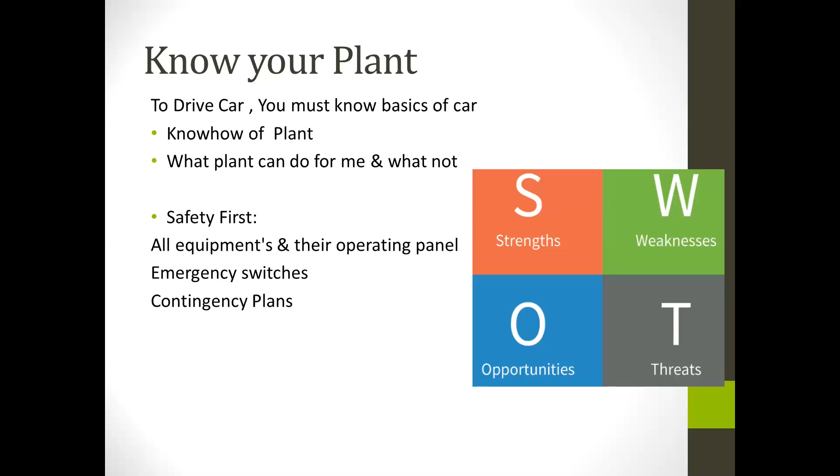Next is equipment capability. Floor manager must know the equipment capability of a plant, or we can say what the plant can do for us and what it can't do for us.

Say a molding machine, for example, ARPA 450. We all know the ARPA 450 machine can have a maximum capacity of 450 kgs. Among these 450 kgs, we have to accommodate weight of a match plate, weight of a pattern cavity, weight of a mold box, and weight of sand. Together, these should not exceed 450 kgs.

If we exceed these 450 kgs with match plate, pattern cavity, mold box, and sand, we could not get a good mold. So we could not blame the production person for mold dilation due to poor hardness.

Next is a furnace. We must know the furnace dimension, coil level, sand cooler capacity, in temperature and weight terminology - how much temperature drop it provides and how much sand it provides per hour.

Bentonite is actually activated in a sand hopper. So storage hopper capacity has a key role in production planning, and likewise it correlates.

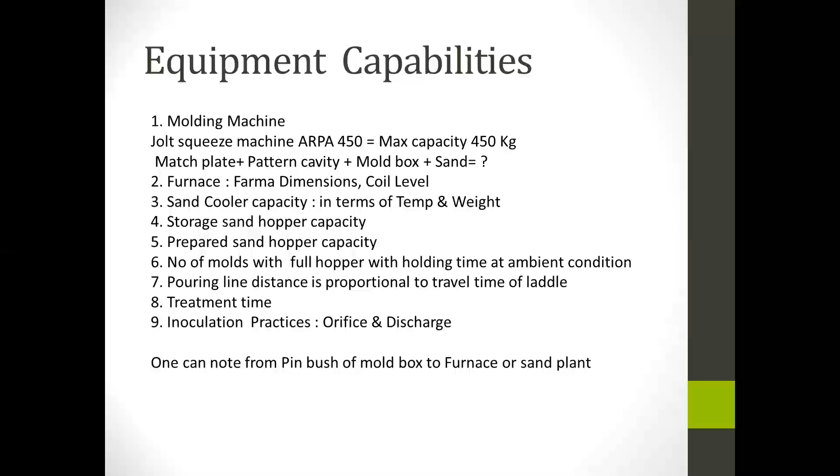According to which, pouring line distance is proportional to the travel time of a ladle. We must know the treatment time, inoculation practices. For the inoculation addition, what is the orifice size, what is the discharge of the inoculation. So one can note from pin bush of a mold box to the furnace or the sand plant.

Togetherly, on a technical basis, this saturation of information is called a design manual. In technical terms, the same thing is interpreted at QMS as organization knowledge, which is written at IATF 16949, page 24, clause 7.1.6. You know what a plant can do.

That is the basic thing - what a design manual can give us. It can give a guideline for development or acceptance of a new part. It helps to integrate the existing process. It helps to achieve better control on a process, as well as to set process inspection parameters and its inspection frequency.

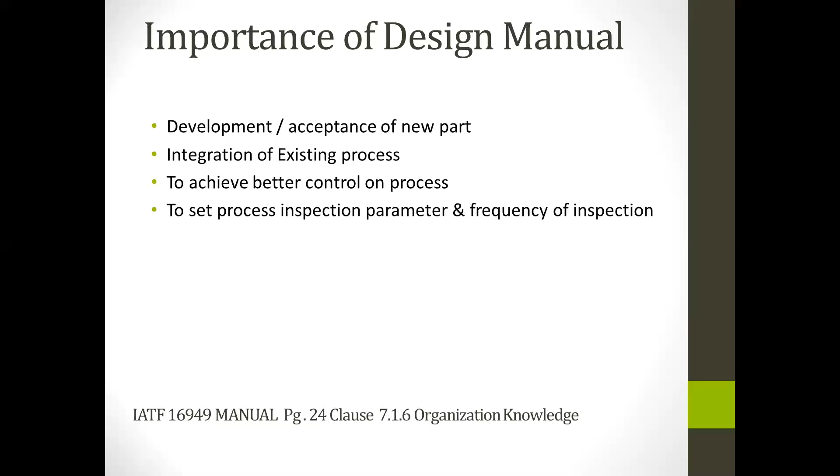But do remember that each company has their own SWOT analysis, so their own customized design manual. One cannot relate each other's design manual.

Then the role of a support function. To work on a shop floor, we need man, material, machine, and method. Method is defined by technical people like us. But to achieve good control, we must control the man, material, and machine.

Man is taken care of by the HR department. Whether you believe it or not, the truth is their target is always cost cutting. Next is material, which is aided by the store and purchase department - there is always an eye of management. And the third one is machine, which is aided by the maintenance department.

According to whatever my experience or whatever I have seen, it is the most ignored area in every foundry, but it has maximum cost saving potential.

For example, again we take the example of an ARPA 450 machine. A standard manual or machine manufacturer says the standard operating pressure is 6 bar. If the machine at our plant is consuming 7.5 bar pressure due to leakage issues, so what are we costing for?

We are costing for wear out of parts due to excess pressure, first of all. Then next is the excess cost of air that we are paying for. Then lack of air for other operations. So 1.5 bar pressure looks very small, but it is costing us very much in the long run.

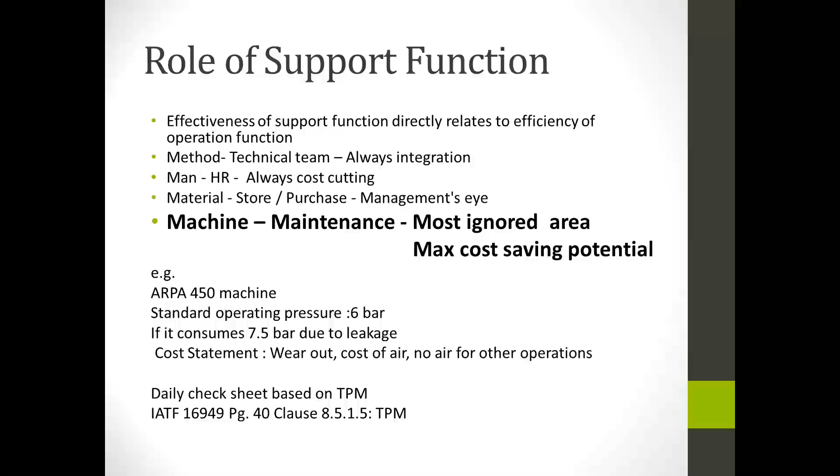Next one is rejection, the most sensible word in a foundry. On an everyday basis, we have to carry this word and live with this word because it is part and parcel of our life. To handle this, the most important thing is data acquisition and data interpretation.

How we collect the data and how we interpret the data. So right finding and right root cause of a defect is 99% of the achievement of a solution.

Monitoring of rejection is another thing, but monitoring of rejection on a production quantity versus inspection quantity is nowadays a question mark, because most of the foundries I have seen are monitoring rejection on production quantity, but the part which has not been inspected is only at the inventory. How can we say that it is a right part or a wrong part?

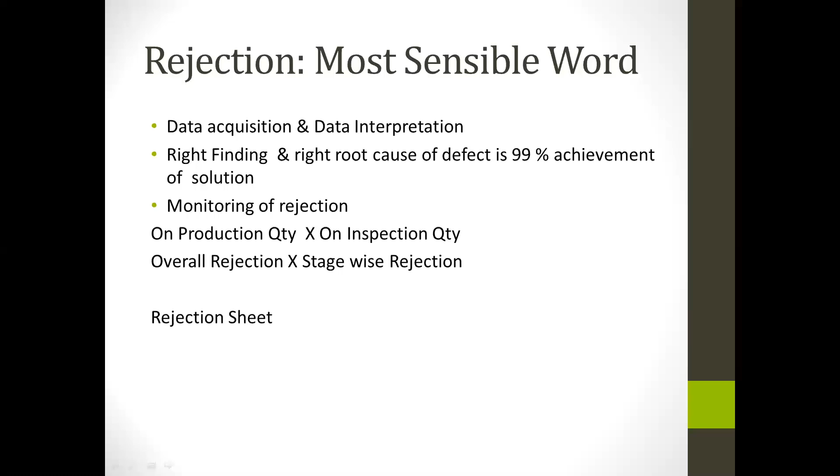Another aspect is overall rejection and stage-wise rejection. We have produced parts at different stages. So we could not correlate the part at the fettling stage with the part at the machining stage with the part at the customer stage.

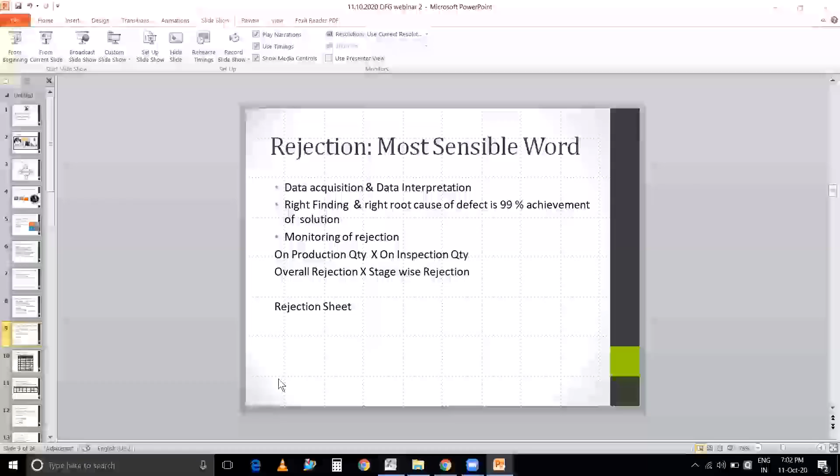So I would like to show an Excel sheet.

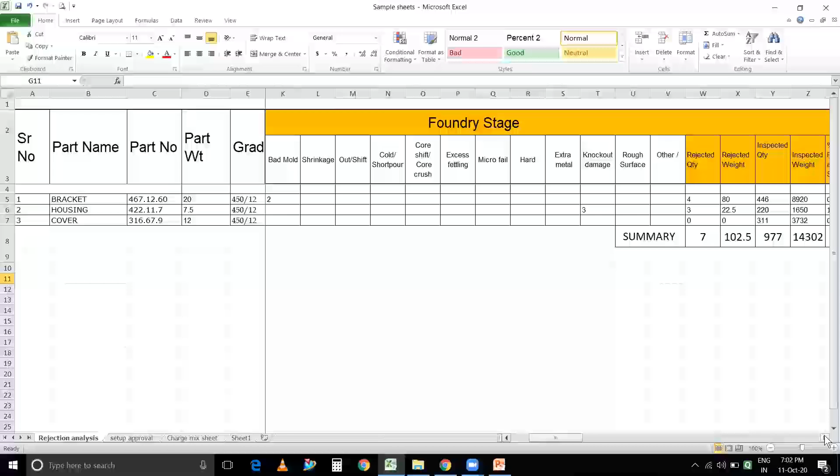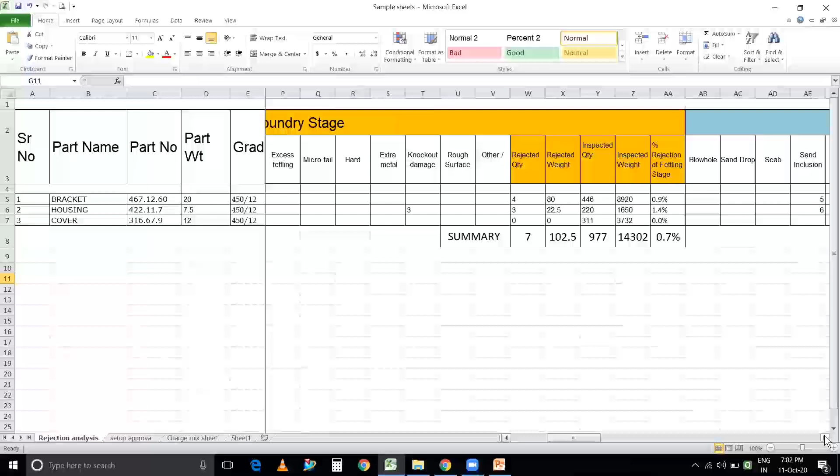Yes, here is a part name, number, part details. We have to take care of the foundry stage - the rejected quantity at the foundry stage and inspected quantity at the foundry stage. So rejection at the foundry stage is different, then rejection at the machining stage is different. Likewise, rejection at the customer stage is different. So we could not correlate these three stages with each other.

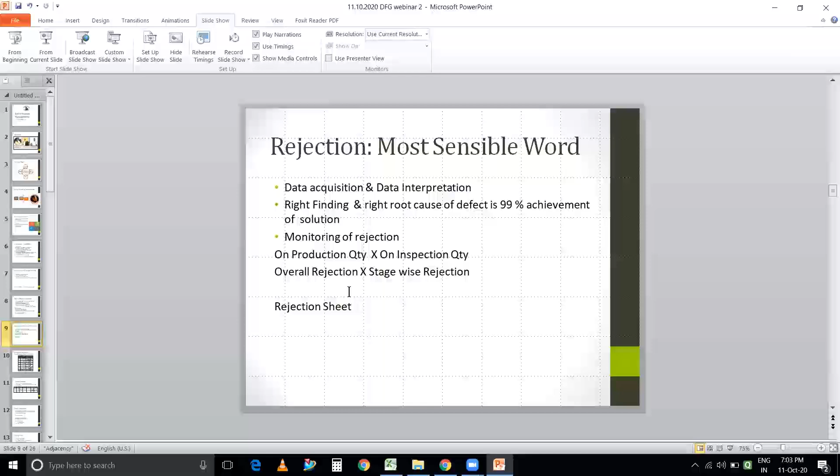Strategic approach for evaluation of a defective part. How we do the evaluation of a defective part is a crucial thing in a foundry. For example, I have generated my own sheet.

First, we identify the defect, say it is a blowhole. Then, at what stage the defect came out? It is at a machining stage. Then it comes with a severity, how much it contributes. Defected are 10 numbers, inspected quantity 100 numbers, so severity is 10%.

Then we go for traceability. When it happens on the same day, different heat code, shift number 1. Then next is the location of the defect. Cope box on a flange, all parts have the same location.

Then according to our experience, we found out probable causes for a blowhole defect. It can be due to sand moisture increase, metallurgical aspect, and venting.

Based on probable causes, we have to check reports - that is verification of a report. For sand moisture, we check molding sand reports. For metallurgy, we check lab reports, and for venting, it is our past experience, TGR and TGW.

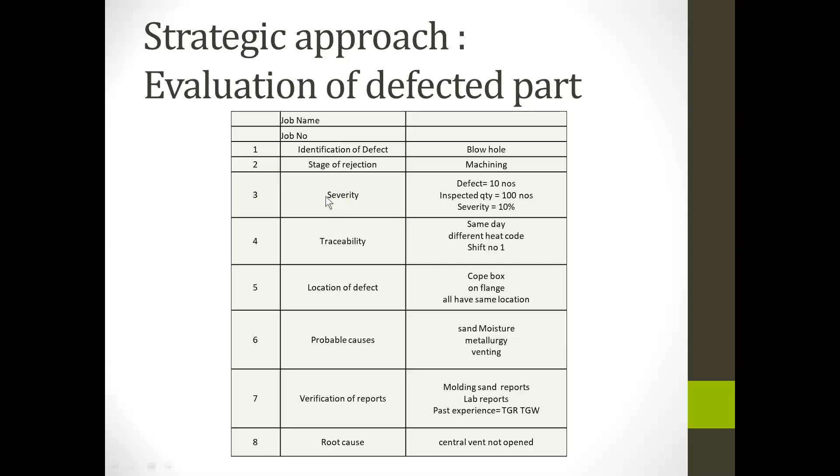Like a design manual, we can also make a defect manual. Based on this data, we can generate a part-wise defect manual.

Usually defect relates with the geometry of a part. Every part has a different geometry, but we can also check out that a periodic defect is happening with the same kind of part. So it depends on plant capability, foundry practices, and geometry.

Likewise, a date, defect, defect severity, defect location, its root cause, and action taken. So in the near future, if we get the same type of defect, we can also recall what action we had taken.

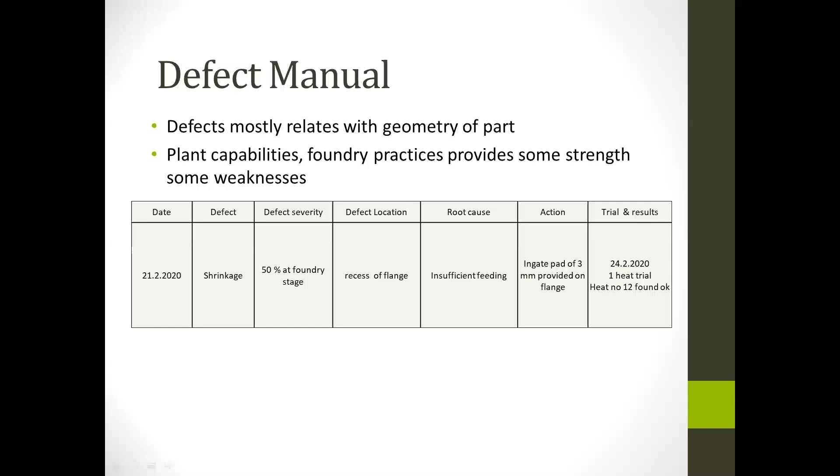Setup approval or a first piece inspection. Foundry person must know what to control at what time. According to system, verification of a job setup is nothing but a setup approval. It is an act of detection, but can save a lot for us.

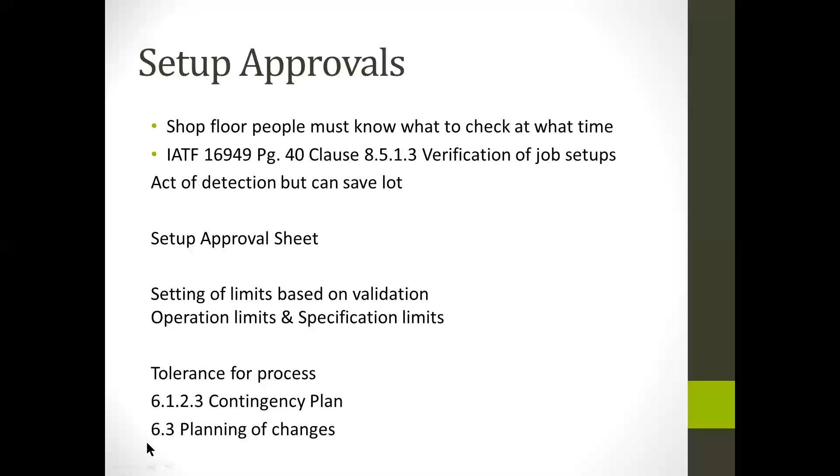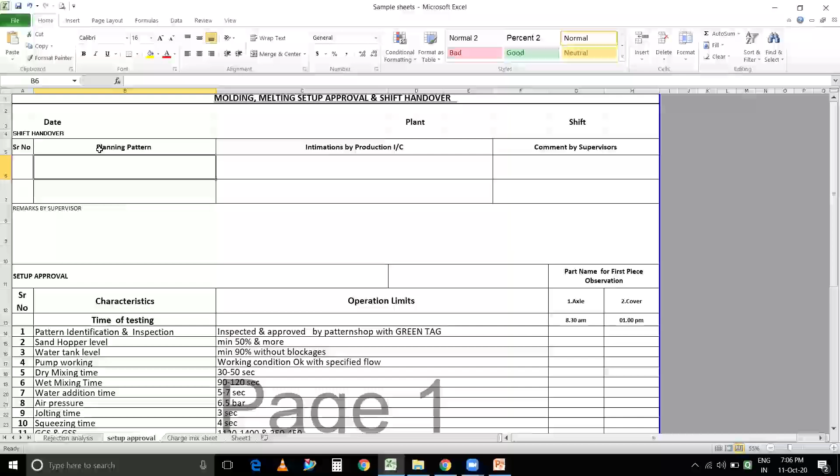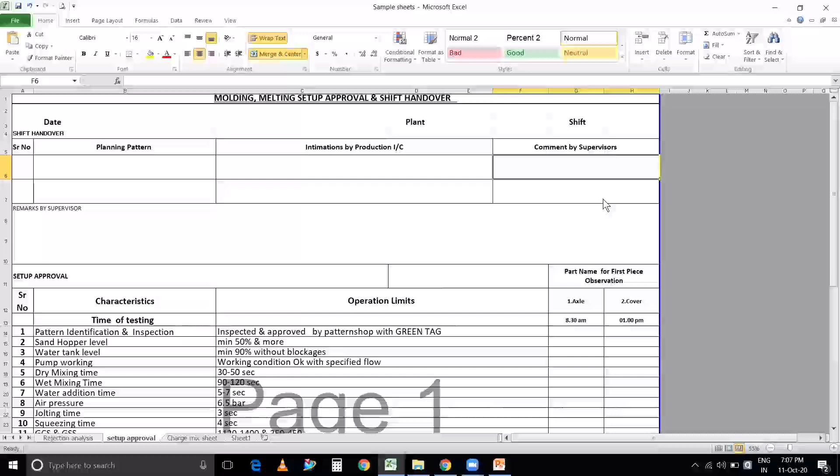I would like to show one of the setup approvals. This is a production plant setup approval, which pattern is on the planning, what special intimations provided by the production in charge, and what comment or what happening is recorded by the supervisors. So it is just like a communication book.

Then what he must check before the production. First one is pattern identification and its inspection. It should be inspected and approved by the pattern shop with a green tag. Then sand hopper level, water tank level, pump working, dry mixing time, water addition, air pressure.

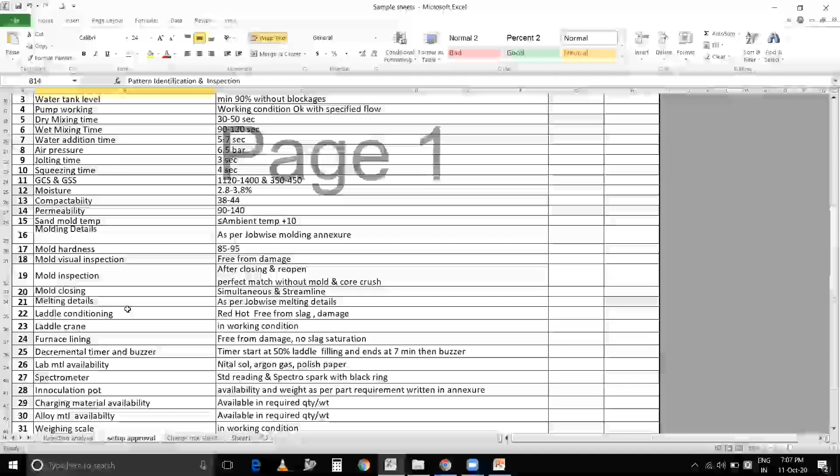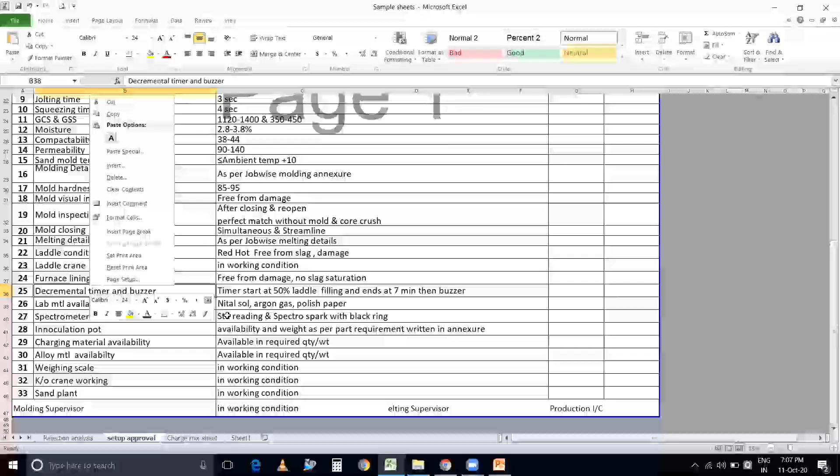Likewise, mold hardness, mold visual inspection, mold closing, melting details, ladle conditioning, ladle crane working, furnace lining, timer or buzzers working. Spectrometer should have a standard reading. Spectrospark with a black ring. Inoculation pot must be available and weight as per requirement of the part.

Charging material availability. So if we first of all check all these parameters, then we have fewer hurdles at a production site.

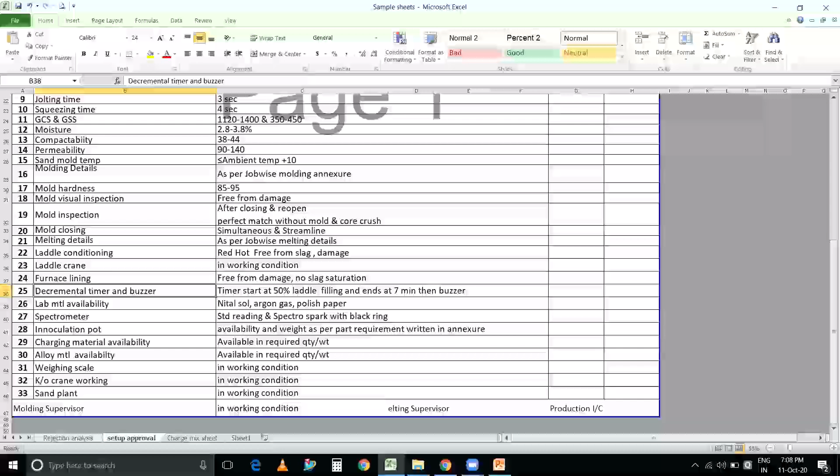Setting up of operating limit and specification limit. There are two types of limit. One is operation limit, which has a narrow width in which shop floor is supposed to work. And another is the specification limit, out of which part fails. Both limits decide through the validation. One must do a validation to decide both the limits.

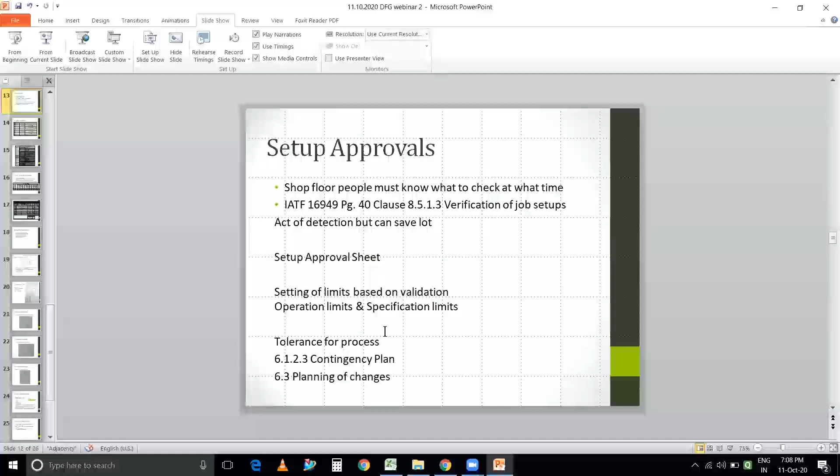The crucial activity in our day-to-day foundry practice is charge mixing. We have to add CRCA, RR, boring, scrap, and the alloys. But what is the recovery of alloys? What is the condition of the CRCA of today's lot?

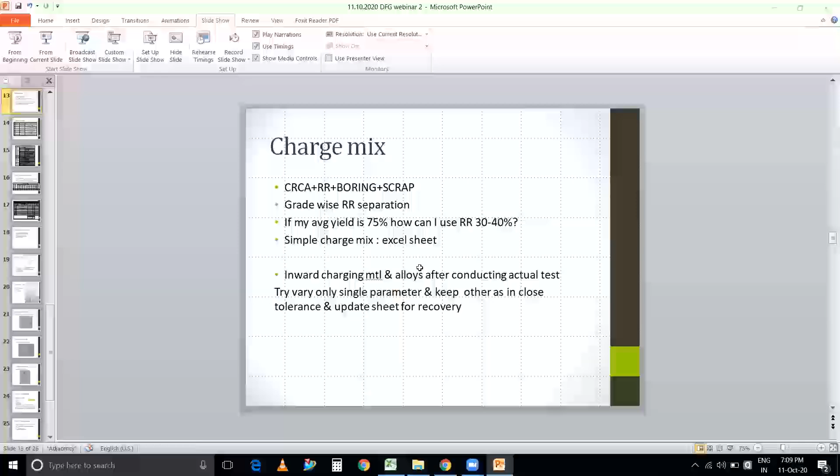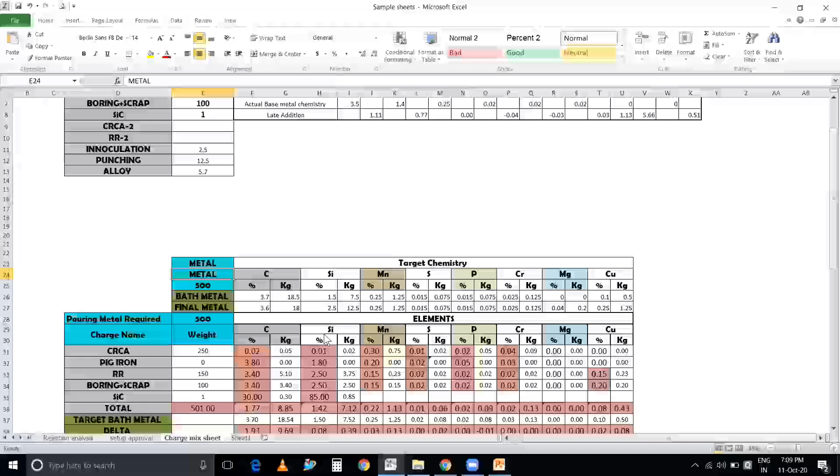Making... so we have to set. I have here my Excel sheet. We have to set first of all a bath metal target and a final chemistry in terms of percentage as well as kgs. So if we put in the values of CRCA, RR, boring and scrap, we do get values of what amount of addition of alloys we require.

It will be the easiest solution on a shop floor to work with.

Inward charging material and alloys after conducting an actual test. Try to vary only a single parameter and keep others as close tolerance and update the sheet for recovery.

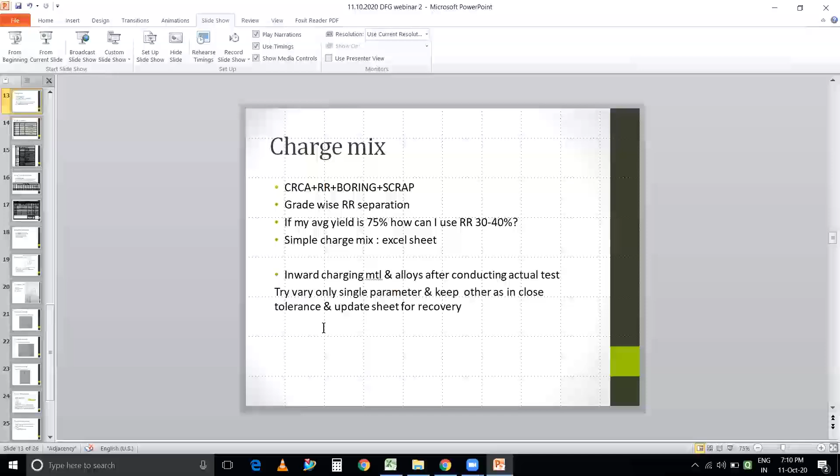How a daily activity should be planned. If we take it as 8 to 8.5 hours of a shift or working hour of a foundryman, we can distribute it in 5 segments.

First 2 hours, he must evaluate yesterday's happening, evaluation of respective departments. Then half an hour should be the CFT morning meeting for production, consumption, issues, rejection and all that.

Then next 2 hours should be consumed on root cause analysis and finding. Another 2 hours for the preventive action. And one of the best things of planning is to plan in advance. Last 2 hours for the planning of tomorrow's tooling readiness and material availability.

We talk about the evaluation of a respective department based on yesterday's performance. What we must see is that a day should start with the fettling department, first with a shot blasted bunch inspection.

5 to 10% of yesterday's production bunch should be kept for inspection by the quality or production manager. What he must see is the extra metal, sand erosion, and riser working - whether the riser has worked or not.

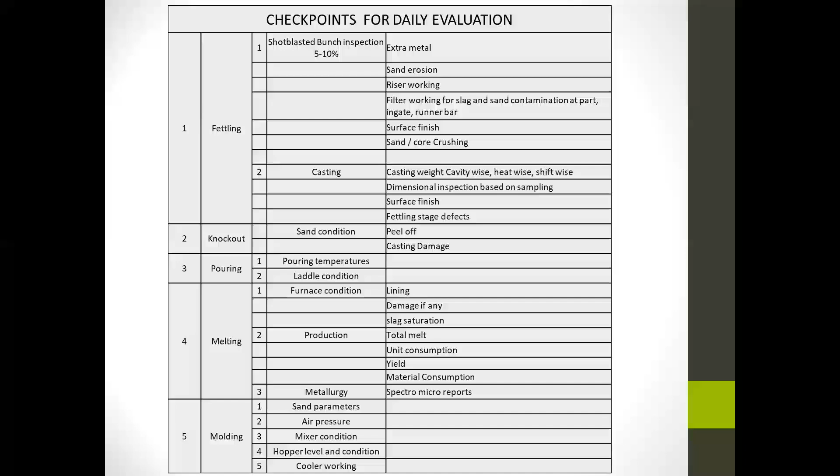Likewise, daily tooling inspection. Daily tooling inspection is a must activity. Once you ignore a tool, the tool will not ignore you.

Identification by tagging is the best method to communicate with the pattern shop, production department, and quality department. Checked and ready for production patterns must be green tagged by the pattern shop. Used and for-inspection tools must be identified with a yellow tag by the production department. Non-productionized or hold tools for quality issues must be red tagged by the quality department.

On a day-to-day basis, the pattern shop checks the tooling for checkpoints like crack, warpage, surface finish, identification, part name, vendor codes, vent condition, pin bush condition, damage or undercuts, clamping condition, gating system as per method card, and matching face free from dents.

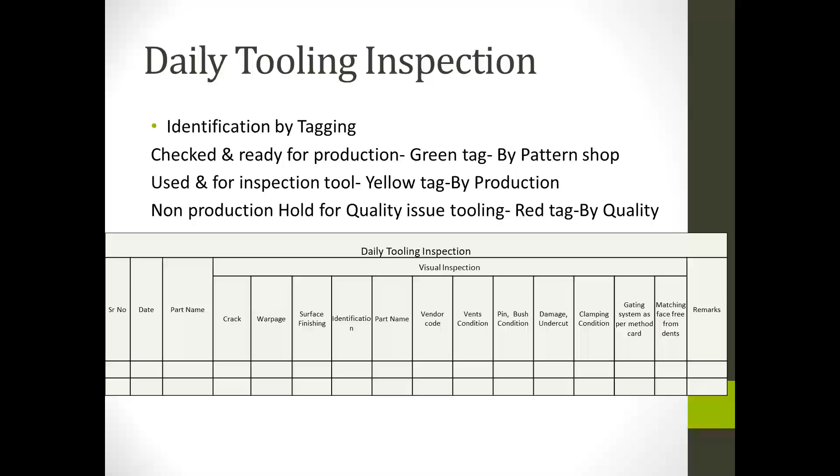It is a simple form of tooling inspection, or we can say a pattern history card. It should start from day one of pattern manufacturing. We have to decide the pattern life, and at 80% of the pattern life, we have to order a new pattern.

Suppose for a cast iron pattern we have set 1 lakh shots - then new tooling order after 80,000 shots is a must. We have to decide layout inspection frequency - say for every 10,000 shots, we have to do a layout inspection.

Likewise, we have to set a 3D scanning inspection frequency - for example, after every 40,000 shots, we do a 3D scanning inspection. So monitoring all these activities along with production can uplift our foundry.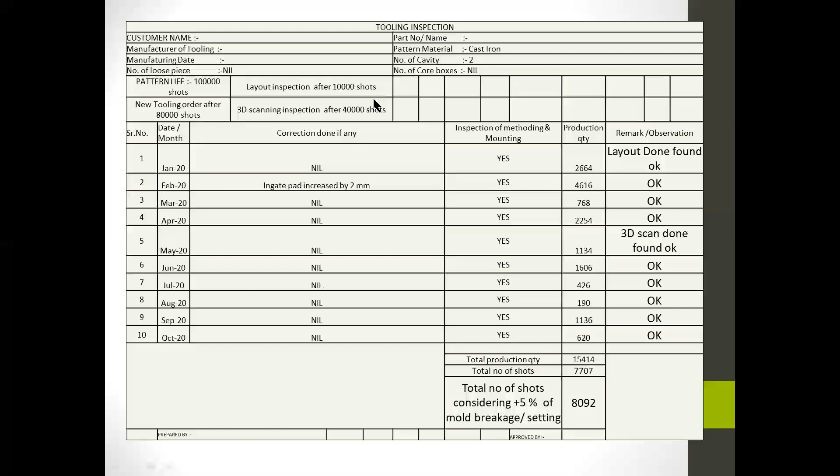At a foundry, we do sampling inspection, so one sample is a representative of all the activities related to that sample. For a sampling inspection, there are some key guidelines like withdrawing the right type of sample and the right amount of sample.

Sample preparation for testing, calibration of testing equipment, then validity of a lab solution. We have to take care of all these points so that the sample we are testing can give the actual results happening at the shop floor.

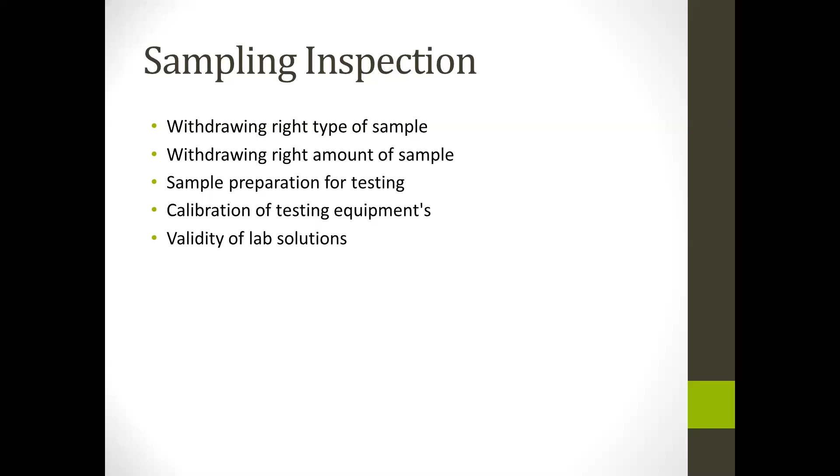There are many tests at a foundry, but right now we talk only about spectro and hardness. A spectro die - this is a standard dimension of a die taken from some foundry standard. It says the material should be copper, with daily verification for damage and cleanliness. The temperature of the die while pouring the coin must not exceed room temperature plus 20 degrees Celsius.

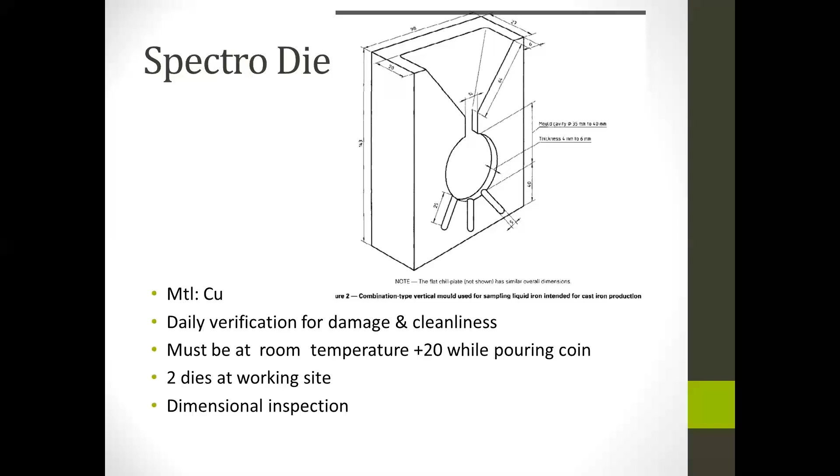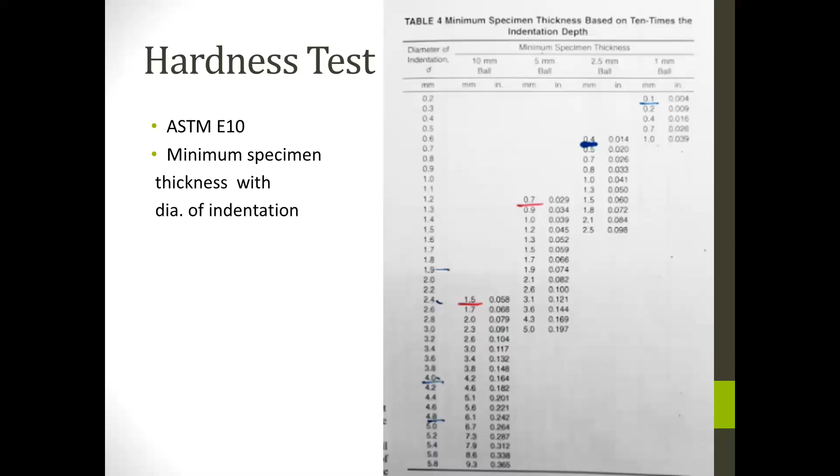Another is a hardness test, per ASTM E10 standard, which specifies minimum specimen thickness relative to the diameter of indentation. Based on this, a 10 mm BHN testing ball could not give a hardness result for a specimen less than 1.5 mm thick. A 5 mm ball could not give a result for a specimen thickness below 0.7 mm.

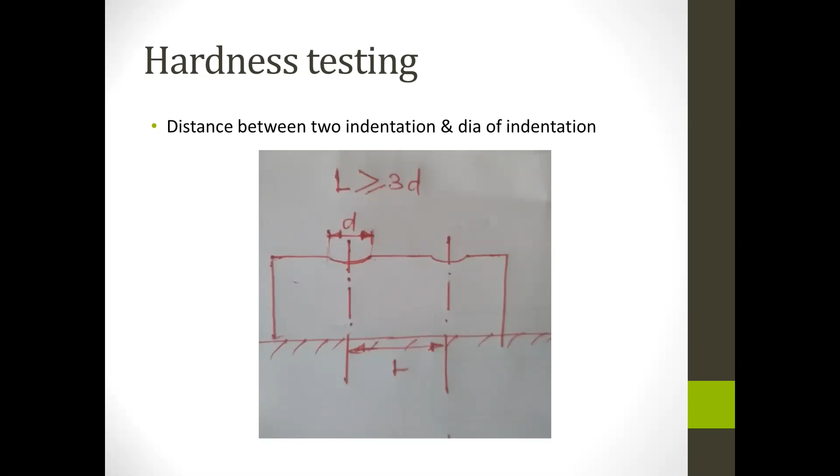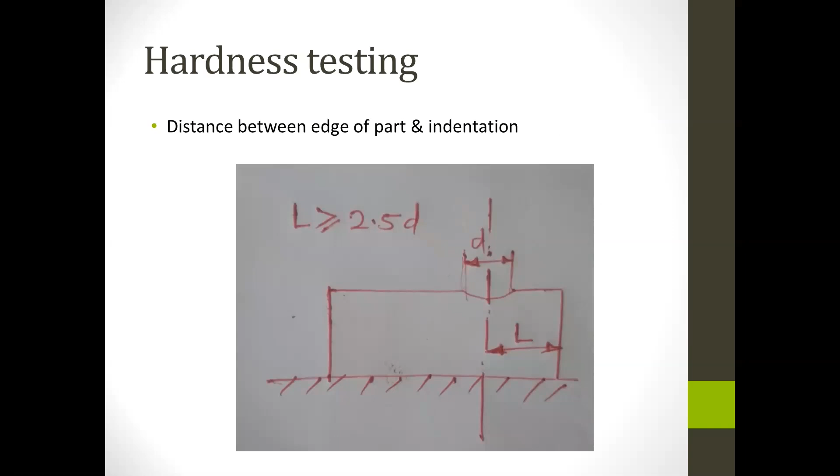There are some cool facts with hardness testing regarding distance between two indentations and the diameter of an indentation. The distance between two indentations must be greater than 3 times the diameter of the indentation. Another rule: the distance between the indentation center line and the edge of a part must be greater than 2.5 times the diameter of the indentation. If we are testing hardness on a curved surface, the radius must be greater than 2.5 times the ball diameter.

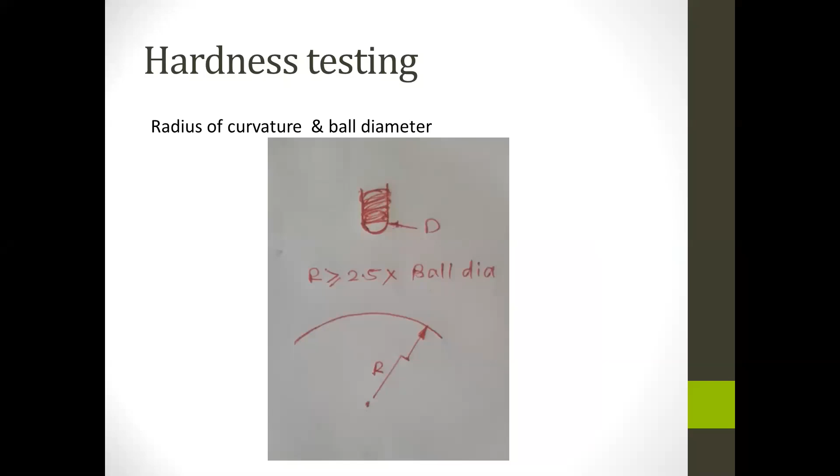After the subject matter knowledge, we come to people management. Nobody wants to fail. Everybody wants the chance to speak, to attain, to learn, to implement, to make the change. People are bound to make mistakes, so build the system likewise. Every foundry must develop their own customized system. We found a communication gap we have to resolve.

The more you communicate with floor people, the more facts get floated. On the floor, we only inspect and supervise, but they actually do the job. Analyze the strength of people, give them a chance to improve, to act, involve them in discussions in CFTs, always keep them in a learning phase so awareness increases. Let them know new facts. If they get ripened, you get the profit.

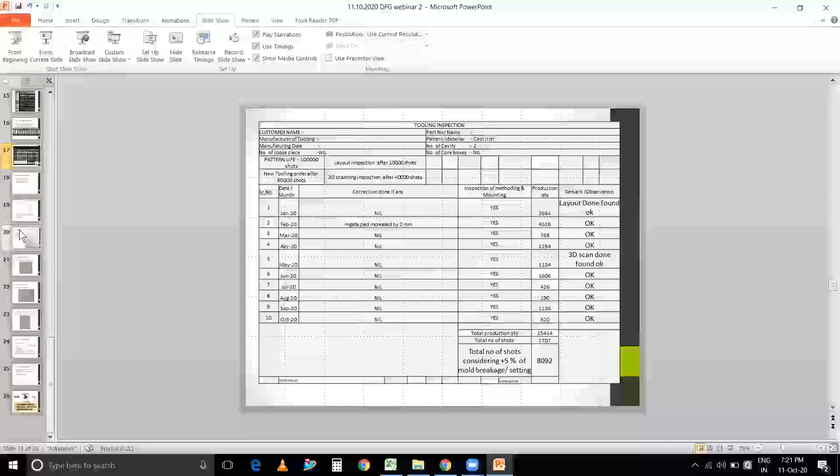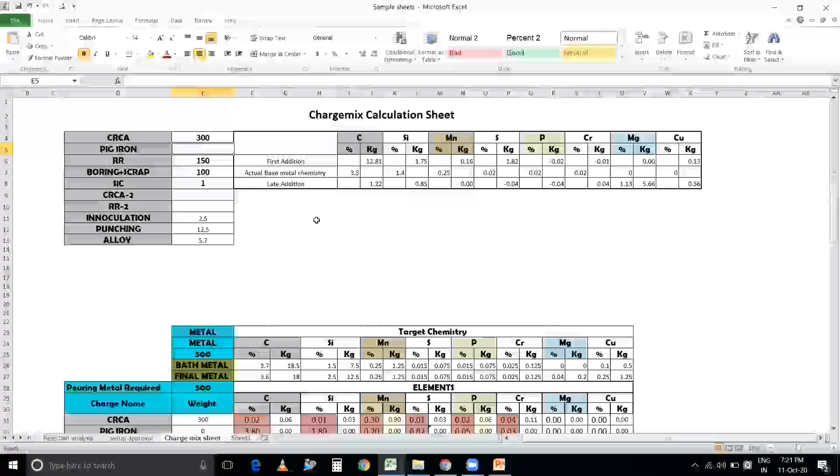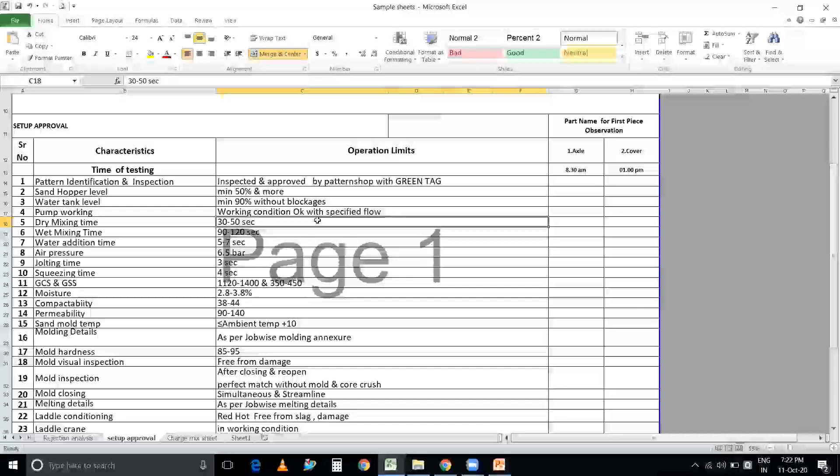Yes, this is from right from tooling to sand plant, molding, melting, everything, including setup approval. Are you thinking that it has to be done by the production person before he starts his shift, or are you looking at it as an auditing point? No, I'm looking that a production person must follow these points.

Because what I can audit is only monitoring of our process, how we are working with our system. Their motto is only that. But if we want more control, we have to look at certain points, so that is what I have said now: what to check and at what time to check must be known to the shop floor person.

So you are asking the production person to check all the points, and if there is any controversy or loophole, he should correct it and then start the production, isn't it? Yes, definitely, so that whatever production happens will be quality production. Yes, it is a preventive approach, rather.

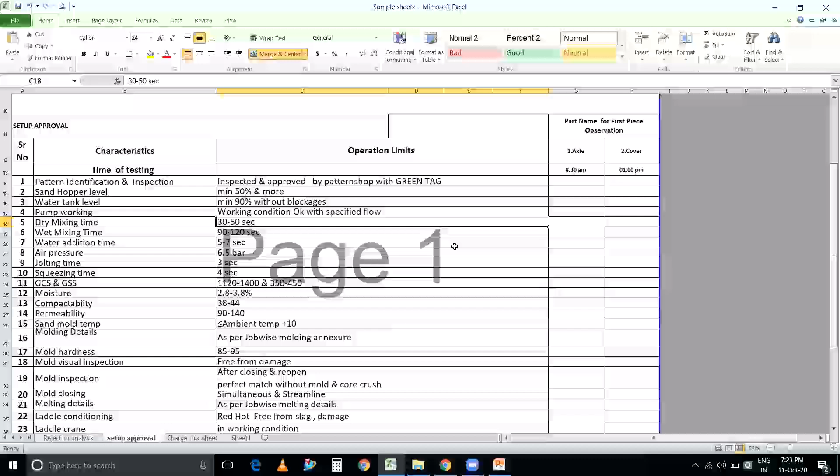Okay, there's one question in the chat box: how to handle patterns. He is asking about lifting, etc. Deepak, are you there? You can answer this question.

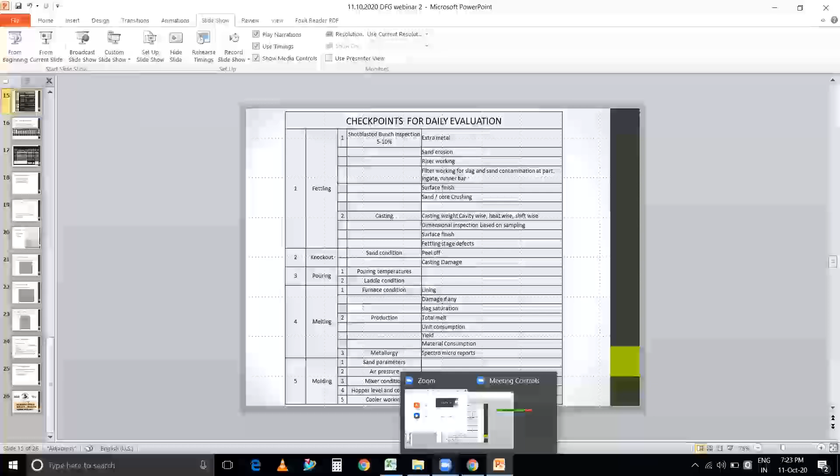The question is how to handle the patterns or lift the patterns. Handling of the pattern needs to be very systematic, of course depending on the foundry, the size of the match plate, and everything. First, develop a proper rack system depending on the size of the match plate. Then handling maybe through a mini crane. While applying with a mini crane, you can lift the pattern with two arms. It should have proper resting, ensuring the pattern does not get touched by the crane. This is one method of handling the pattern.

Sometimes for high pressure molding lines, patterns are kept vertical. If you go for a very high kind of crane, there is a facility for tilting it 90 degrees and keeping the pattern vertical, like keeping a book on a shelf. This is one method, and then vertical stacking can be done.